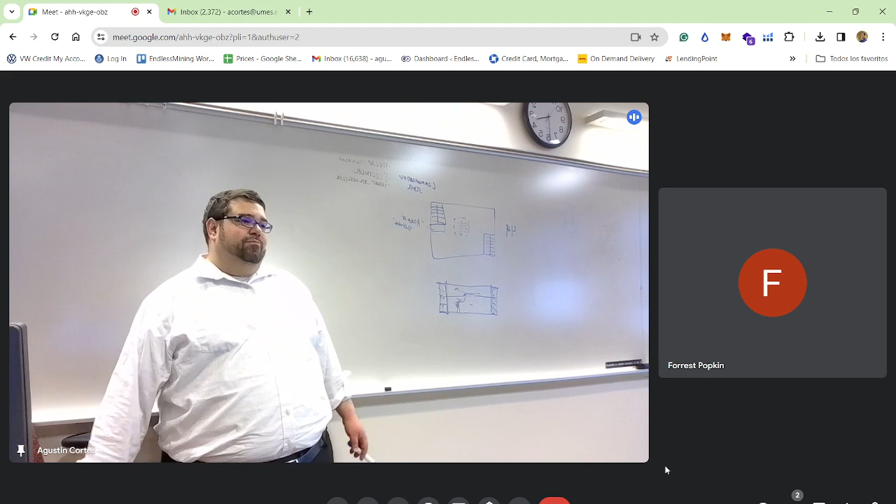So the bottom line here is that the communicating stair is not just able to be this gigantic hole in the floor. So how do you think we solve this problem? Anyone have a theory? Everyone's been to lobbies and stuff where you see these beautiful, sweeping, I'm winging it here, mezzanines, and you have big open stairs that are just sweeping gigantic spaces. Let's just apply this for a second and ask yourselves, how do you think they get away with it?

Fire curtain. What's a fire curtain? Something that sits, I guess the best way I could describe it is like when you're on the boardwalk and businesses put down gates in front of the businesses like that. Yeah, but it basically hides under a bulkhead and kind of operates like a rolling door almost. So maybe I can hide it in a bulkhead that follows this mezzanine, and in the event of a fire, right? The whole thing kind of gets enclosed. Is that what you're kind of saying? And then maybe here there's a slow descent and it cuts off that stair.

Carlos, am I boring you? No. I don't think I've ever had someone so loungy, with their eyes closed, in the last 3 years.

I have a question. This setup that you're doing, you typically want to be on the side of the stairs, or do you typically want to be on the side of those doors? Well, it wouldn't matter. Basically, the idea based on what I said is that you couldn't count this as a means of egress, and you'd have to have another way out anyway. So even if that thing shuts, you're supposed to have another way out. And that's actually why that's the case.

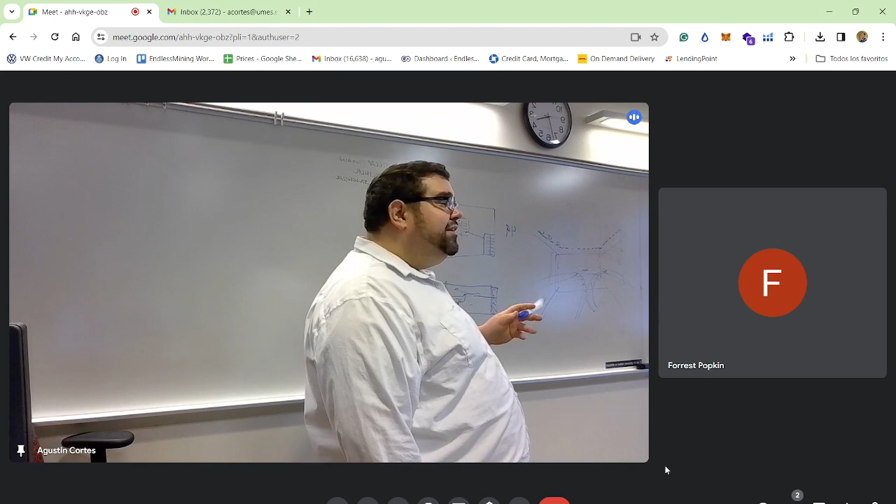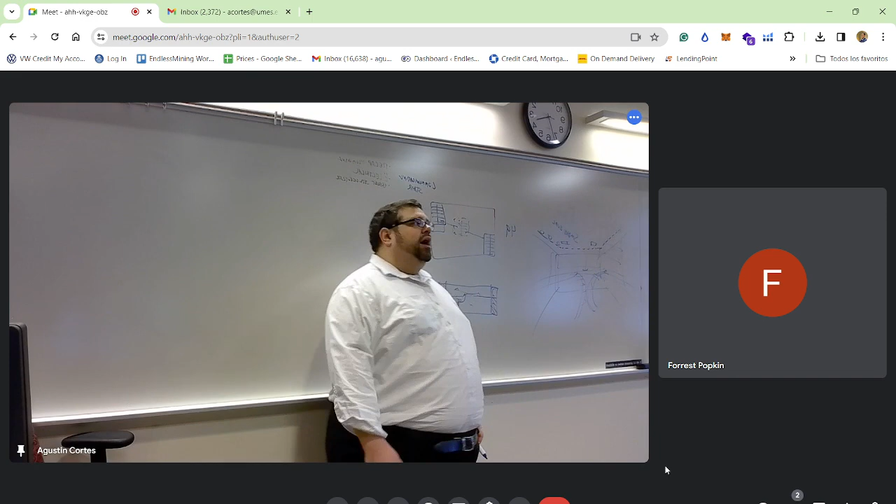Because if you did something like a fire curtain, right? I don't think it's really called a fire curtain per se. I think there's a specific word for that. But that's a good way of framing it, that it's like those things on malls or the boardwalk where you shut down your thing, but they're fire tight. They're not just open. Another way you could do it is with advanced smoke evacuation technology. Smoke evac is when you have HVAC that is designed to have a heavy suction that's connected to your fire alarm.

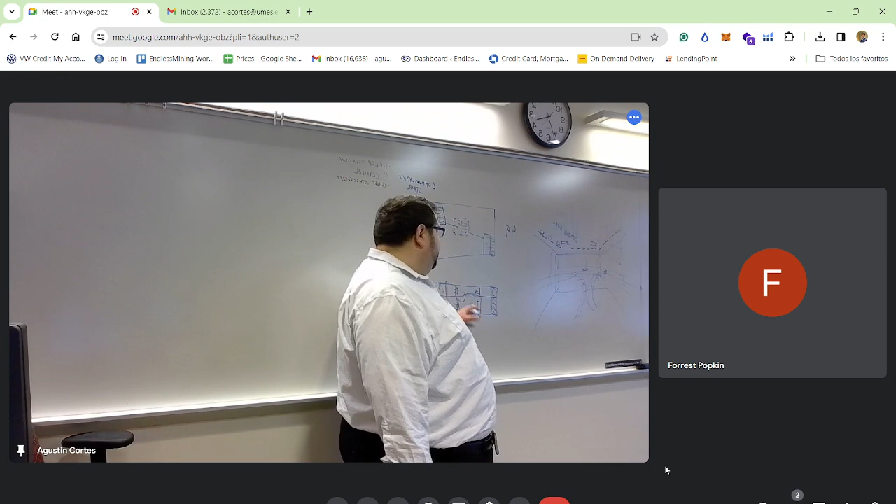Another way you can handle this is by creating situations inside the section plane that create doors that can be shut in the event of a fire. This happens most of the time in office buildings. Next time you go to an office building and you see one of these types of stairs, or a hotel or a school, one of the things you might see is if I have a plan on my second level, and I have my open set of stairs, they come out and it's all monumental looking, that immediately in the periphery, I might have doors that are on hold opens.

These are like walls. And so when the doors are open, it just feels like a more open space. But in the event of a fire, those are on fire alarms and they'll close. That way, people could still exit because they could push through the door and go to the stair, but the smoke isn't just billowing throughout the entire room. Anyone have any clue what we use here in this building?

Hey, everyone get up. You're in for a real treat. Come on, seriously, get up. Come on. I'm in for a real treat. Yes. Let's go. Come on, let's get to it. Part of learning is getting out of your chair now and again. I need this. That is a real treat. I support it. Okay, so one of the things you can do, like in gym class, now that we're up, is okay. Put your hands out here and you get one. Get that blood circulating.

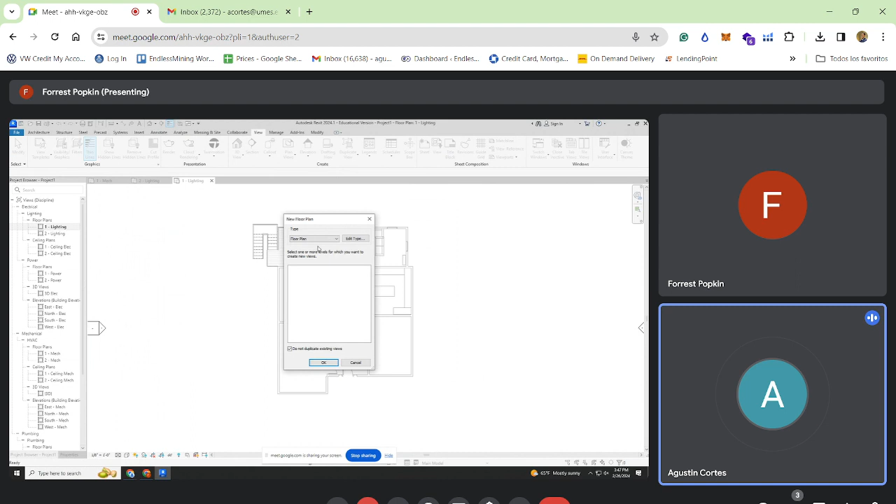You will see that you are limited to the first 2 floors. So just like before, if I need to view another floor, I have to add the level that's commensurate to that floor. Yes. So you know how to do that by now. If I went to floor plan, you'll see it doesn't show any floor plans, because I need to make the level and the elevation to correspond to such a floor.

But right now, let's just focus on the immediate, let's just go to level 1. So we have level 1 lighting, level 1 ceiling plan, level 1 power. On HVAC, we have 1 through 2, and then we have plumbing 1 and 2. So depending on what view we're in, for example, if I click plumbing, you'll see that plumbing 1 has my fixtures there. Oh, yeah. Isn't that a doozy? I linked all my toilets and urinals and stuff.

One of the things that's interesting about that is that every system also has its 3D view. So you'll see here in my 3D view, I have a sink kind of floating in space. Oh, that's actually really, really nice.

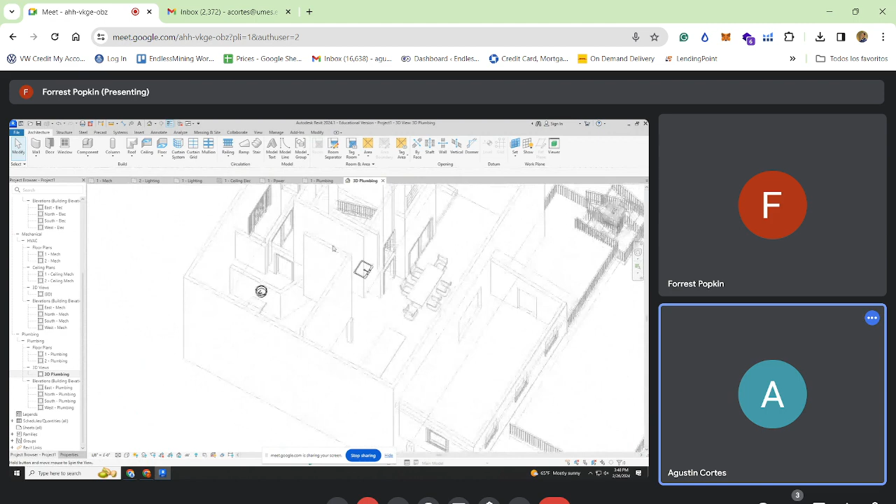I'm glad you're liking the class today. No, it's just a couple seconds ago I was asleep, and what we did right now kind of got me up. Yeah, that Starbucks wasn't doing the trick. I don't drink Starbucks. I know I work there. You don't sample your own product. I don't like it. Have you drank any of the coffee that I gave you? I drank all of it. You want another bag? You trying to get some better grades, man? No, I don't do quid pro quo, but I do like coffee. I have a large supply. I'm getting it from Colombia. It's too bold. I like bold coffee. You're saying all the right things right now. Guys, we are recorded, so please don't admit to any illegal activity. I sell coffee beans on Minecraft. I am so old, I don't know what it means to sell coffee beans on Minecraft.

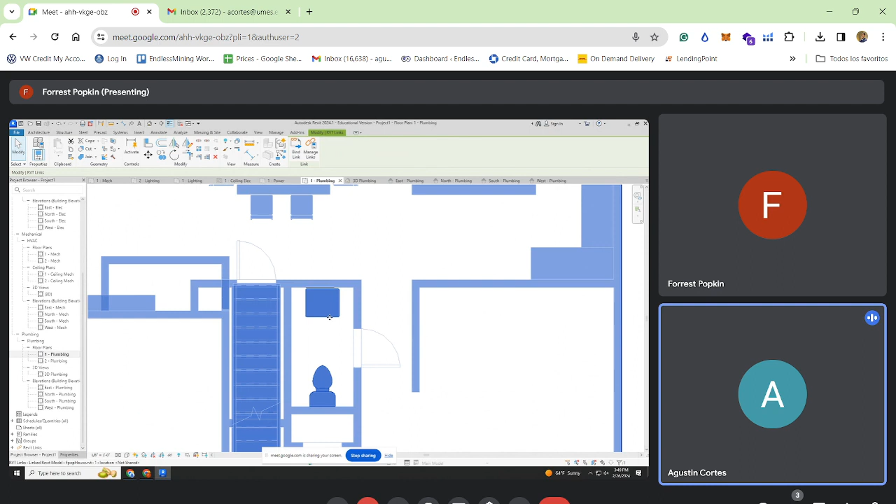So you'll see something interesting. If I try to take my pipes, it won't actually feel like there's anything to connect to. Now, just because it's blue and it shows up doesn't mean that it's actually in the model.

So what's interesting about this is that when you're an architect and you make a plan and you hire consultants from outside to work on the plan, whatever they're putting into the project that's in their scope, be it duct work, water heaters, piping, fixtures, all that really still is their responsibility as the consultant. So you might show a specific style of toilet, but ultimately they might dictate, maybe it should be this type of toilet.

So this is the opportunity for you as an engineer to be like, hey, I saw that you specified a floor-mounted flush tank toilet. I think we want to do a wall-mounted toilet. So the bottom line is, even though you designed this already and put a toilet in its place, in the systems model you're expecting to put the fixture back in place.

So you have to actually overlap it and put another type of that in its place. Otherwise, you're not going to be able to link to it in the systems. Carlos, I just got done explaining why. So don't make that face. We can talk about it again.

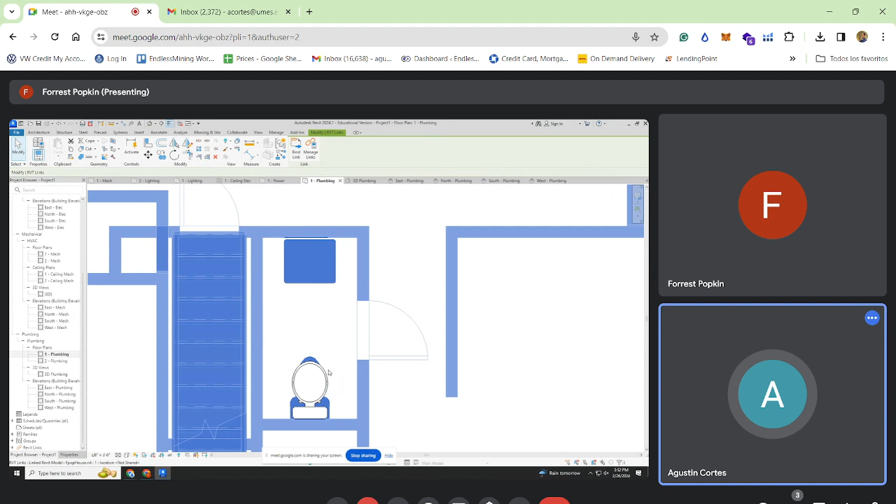So I'm going to go ahead and rotate this puppy in place. And you'll see it doesn't even look the same. So what I would do with my architect would be I'd coordinate this with them, saying, hey, this is the model. They'd probably end up removing the one that they did, and they'd match yours as an engineer. But the point is, now that I have a fixture on the screen that has an in for cold water and an out for sanitary, I'm able to make those connections we were talking about the other day.

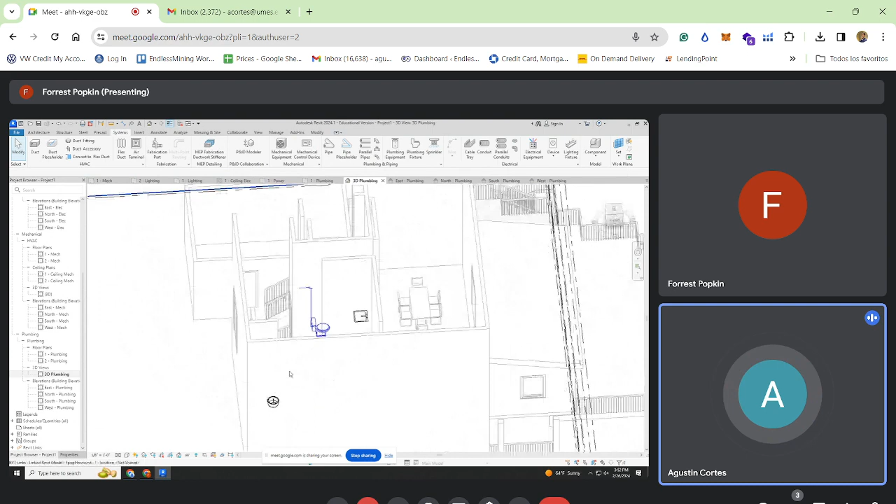So in my model, I should be able to take the pipe now and run a pipe. And of course, as we talked about at the top of class, blue will be the water line. Typically, water lines will be run in the floor above, getting you to wherever it needs to go below. Sanitary, of course, would be different. It will come from below. You gotta make sure you're actually connecting. So we talked about this the other day. It should be an X, right?

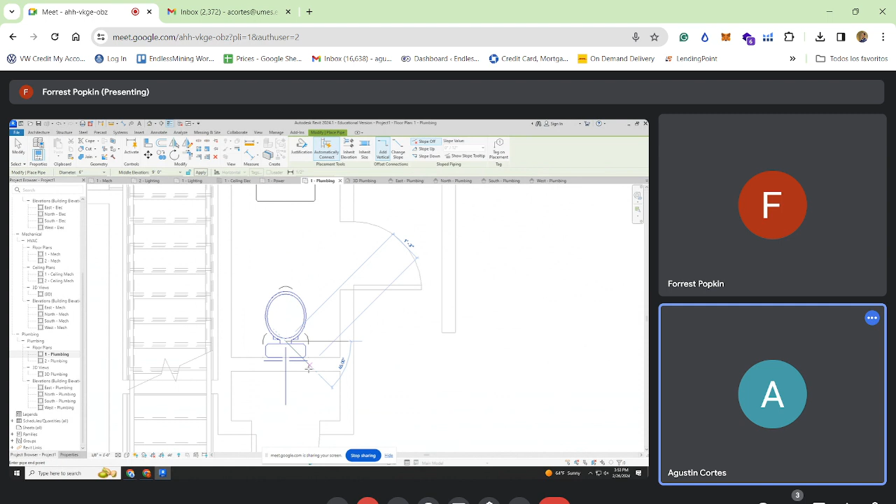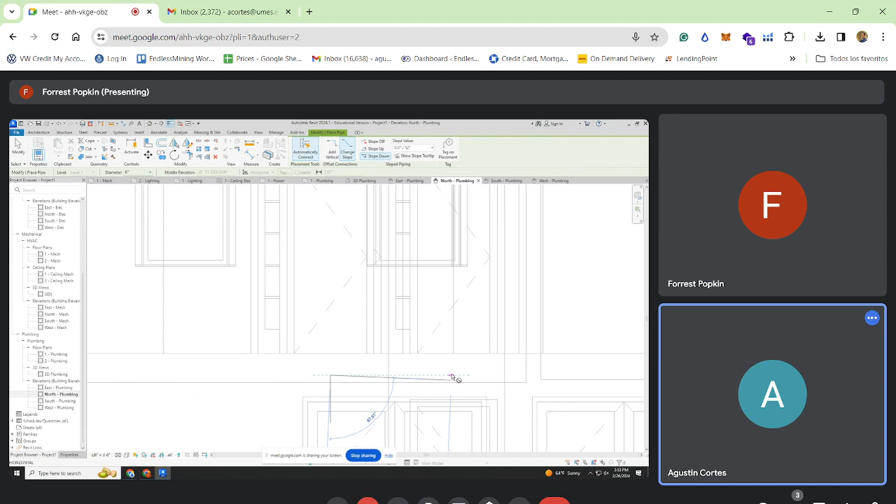So again, you're gonna have to have different views open to be able to do this without losing your mind. But usually the sanitary connection point will be the junction of your fixture and the floor. So in this instance, we don't want to add a vertical. We'd like it to have a slope down, so change the slope and pick a slope of some kind. So I'll do 1/2 inch. So you change slope and then select the slope down, and then you select the value. Yeah. And you remove automatically connect, right? Yeah. After you have the stub out.

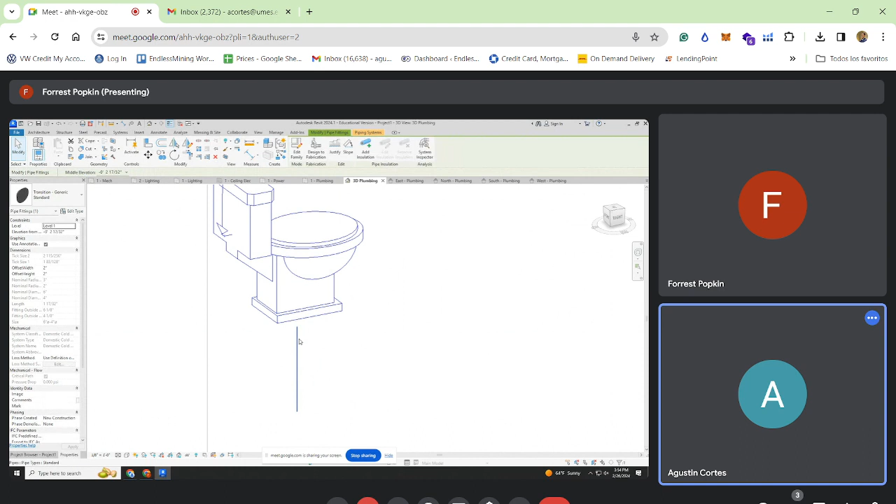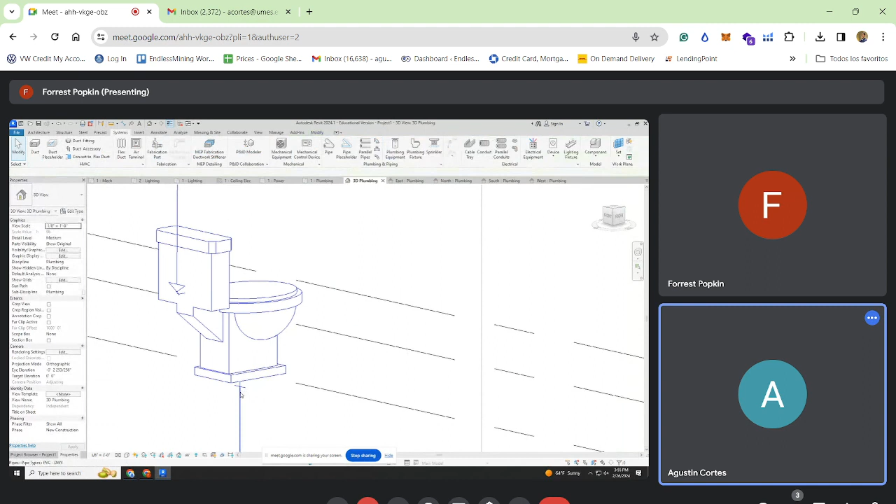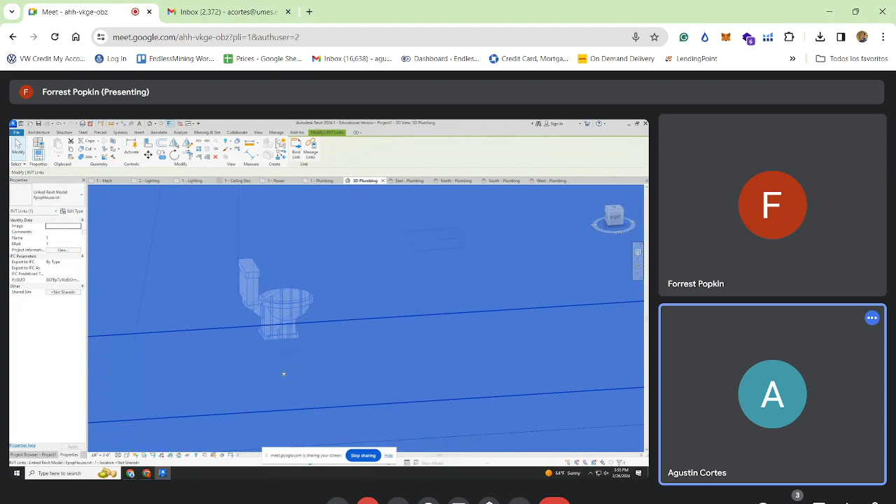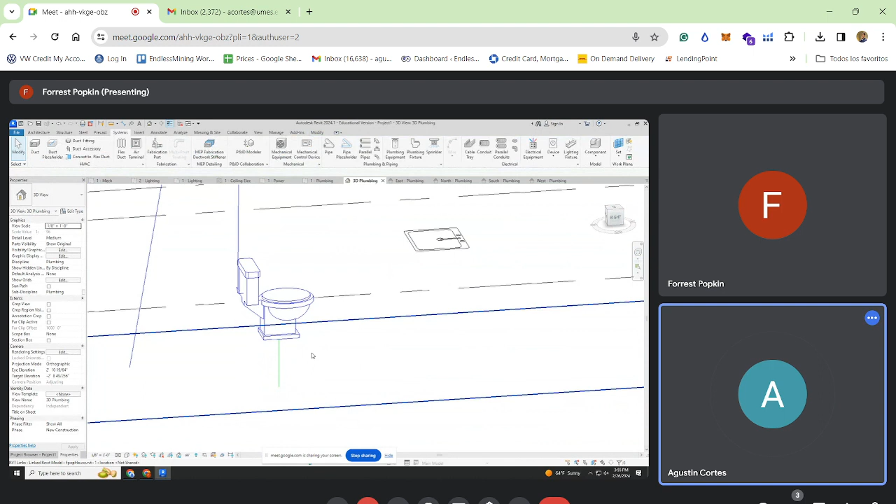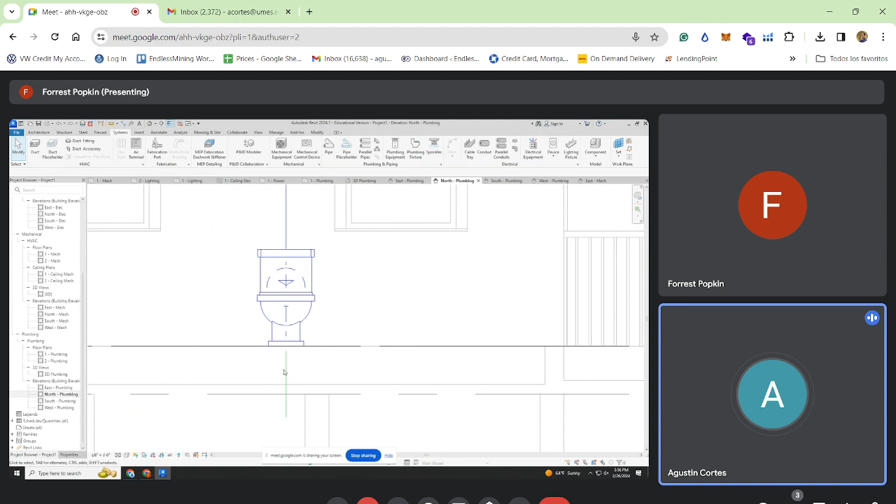Let's say I didn't put it right on the wall. I wouldn't be able to move the original model from this view, correct? I'd have to open it up. Yeah. Now you can, of course, place the toilet in a slightly different location and go back and fix it in your other model. There's no crime against that. Does that make sense? Yeah. I don't know why I left a half-inch between the wall and the toilet on every single toilet. Sometimes it doesn't look right if you put it like that.

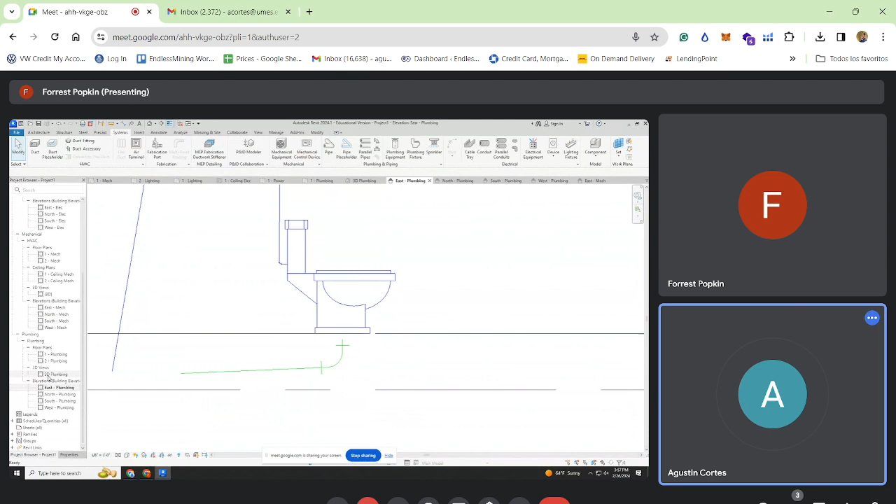I have a question. For me? Yep. What do we do if we cannot see the lines under plumbing? If we're just placing the lines and we don't see any of it. Have you looked at different views to see if it's still not showing up? Yep, on 3D views, it's not showing. Are you sure you're clicking the right 3D view? You have to be in plumbing. 3D plumbing, that's what I meant. And you added the pipes? I added a pipe here. So maybe it just didn't draw? You don't see them anywhere? I don't see any information in there.

Plumbing, right? Okay, then you add the toilet. I told you to add a toilet, remember? This is not added here? No, I told you this already. I said you have to reconnect a plumbing family. So you have to go to your families. Under systems, you go to fixture, plumbing fixture. And you have to add a toilet in that place. The exact same place? Yes, exactly. Where were you? I had a whole conversation about that. As silly as that sounds, you have to do that. Otherwise, you're not going to have something to connect to, because it doesn't read your baseline model as having a plumbing connection.

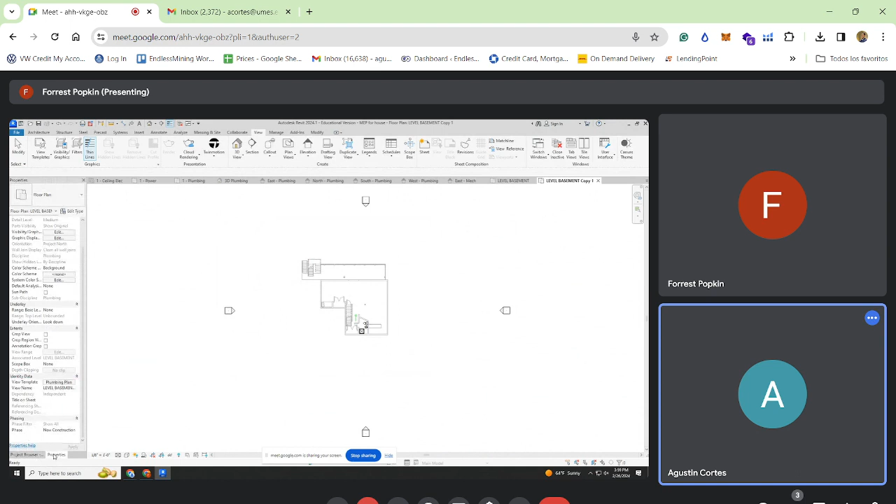So one of the things you're going to have to do for your model, whether it's on your first floor, second floor, wherever, is you have to understand where your water heaters are going to be. In a commercial office, it's not uncommon for every floor to have its own water heater. If you don't have a heavy use of water, like a commercial kitchen, but you have a few hand sinks, whether it be a kitchen sink or not, and a few toilets, typically you could do the work with what's called a low boy water heater.

I actually noticed one today in my office. I should have taken a photo. But a low boy water heater is actually pretty cool. Basically, if I have a door on the wall and I walk in, now I'm inside the bathroom, I'll have my ceiling plane, and then there'll be structural deck above. This is where all the duct work is going for the venting and sprinkler lines. Typically you'll have what's called a unistrut system that creates a box, and a little cylinder sits on top of that unistrut, and that connects in the wall to supply hot water for that sink.

Why? Because how often am I washing my hands in an office? It's a few people now and again. I don't need a gigantic water heater for that, right? So these low boy guys will suffice. But for the sake of argument, let's say every floor had to have a water heater. Well, now you're experiencing your first architect headache. I didn't give you space for that. In your floor plans, I never told you you had to have room for a water heater. Guess what? Now I'm telling you. Boom, a water heater in there. Okay, there you go.

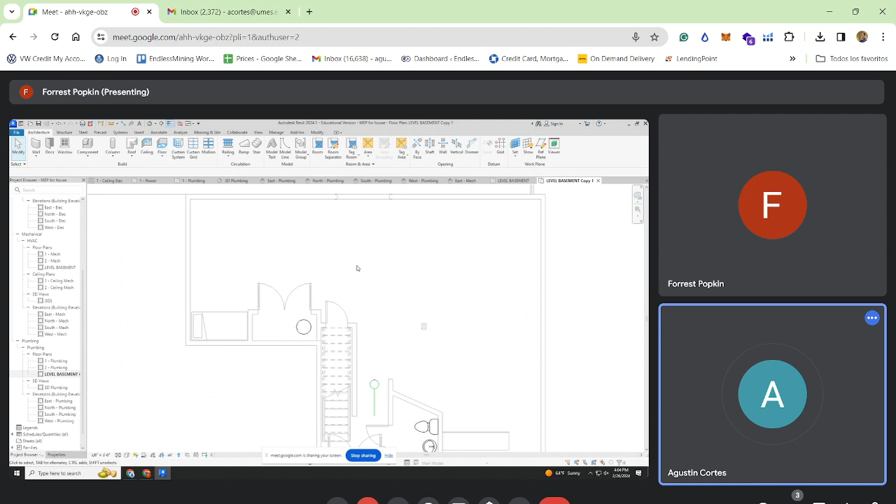And I put in bidets back in the day. If you want to put a bidet in, that's up to you. Nothing says I'm comfortable with my colleagues like sharing a bidet. Probably culture. I'm not going to talk about it. What you do in your building is up to you.

So go ahead and play with that for another few minutes, and then we're going to talk quickly about baseline electrical.

How big is a water heater room typically? If it's just dedicated for that one purpose, I'd say 3 feet by 3 feet, because that's pretty much the size of the door. Okay. And then what about rooms for the furnaces and the electrical panel? Are those similar size? 3 feet by 5 feet for a furnace, an electrical room 3 feet by 5 feet.

Great questions. Do you want us to make the electrical panel, the air handling unit, and the water heater right now? No, I'll get to that.

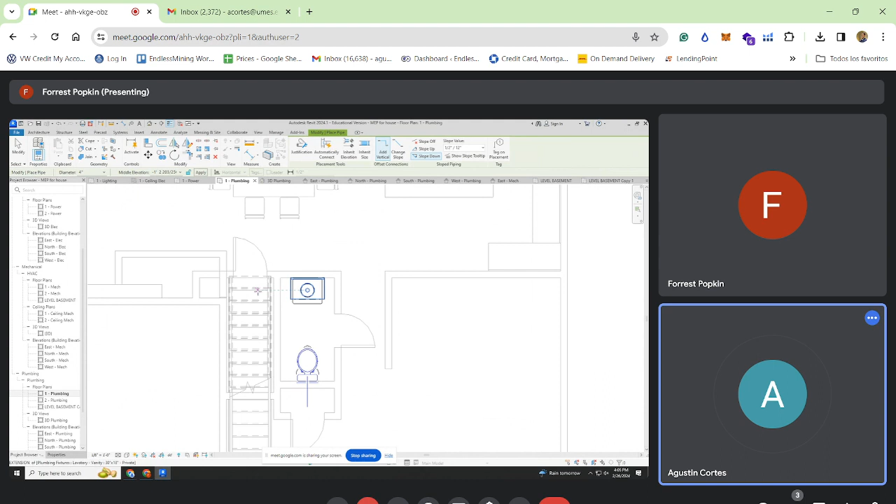It's cool to start to see your building connect between floors.

So in my house, I have a water heater in the basement, which is why it takes forever for my daughter to get hot water to wash her face. But that's another story.

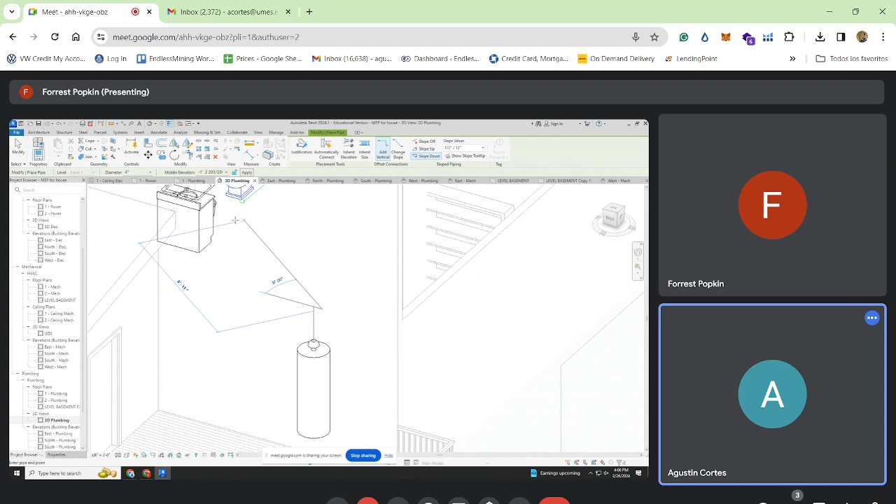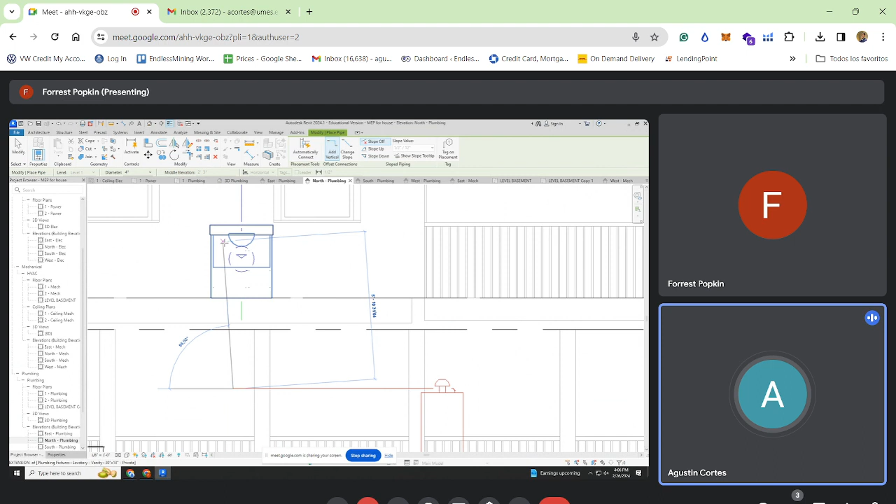I have another question. Yeah, what's up? You might have mentioned it, I think I might have heard you when you were talking about this. Do we also need to leave the previous water faucets and all the stuff from the bathrooms that we did? No. Okay. When you reload the system, is it supposed to replace it automatically? No. Well, the problem is if you delete it, then it's not going to show up on your other model, right? Okay, because right now I have two of them showing.

Yes, and until we reload the MEP model, I don't want you to do that because then your toilets will disappear. So for now, endure the awkwardness of having two toilets, two sinks. But once you get all this stuff put in, you can relink your MEP model to your architectural model, and then all that stuff will show up. Does that make sense? Yes.

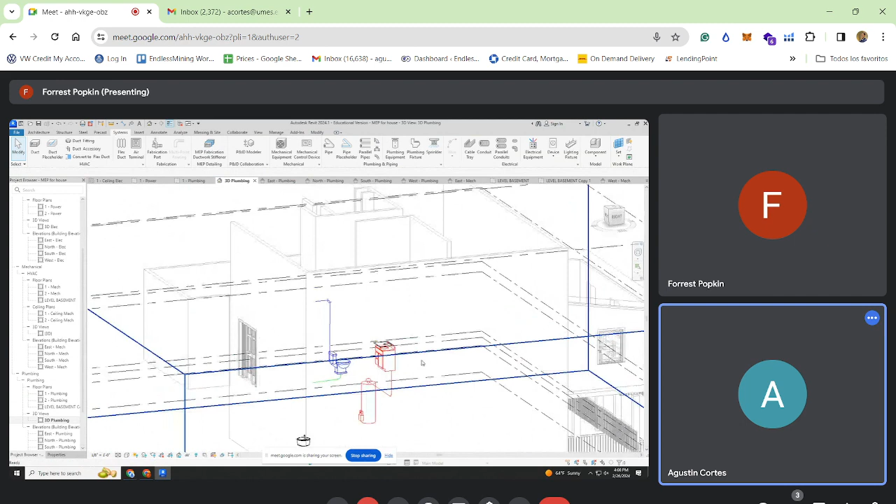So one of the other things you're going to ask yourself: how does water come into my office building? Typically, you'll have a water room. And that's also near where your sprinkler room will be. Uh-oh, I also didn't mention those. Now, the good news is you have warehouse space. Easily notch out a little piece of those. But typically, you want all your water in your building to originate in one single source, right? Because you need your cold water to originate somewhere. It's just another thing to think about.

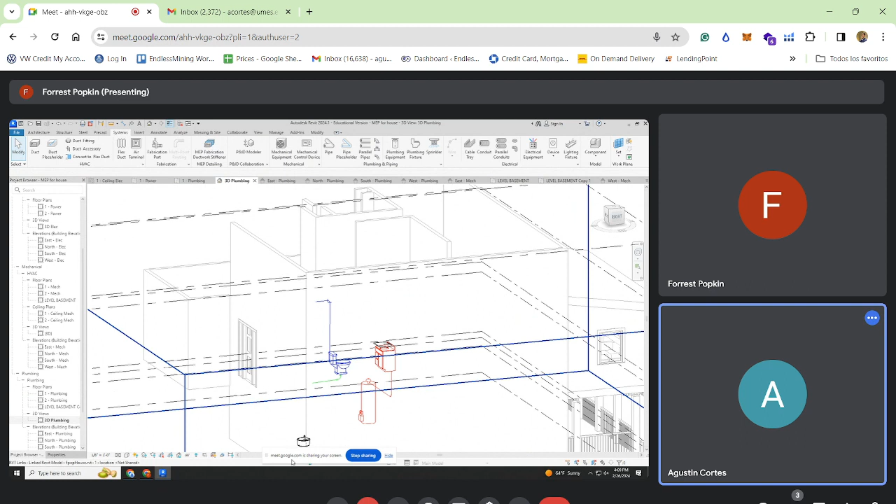Hey, Professor. I'm kind of struggling how to get more levels. Oh, actually, I see it now. Hold on, while you're on that topic, let's just look at this together. So again, my MEP reference model is a little different than my architectural model. Let's just go to electrical plans. In my electrical plans, I don't have a roofing plan. Let's say I want to go to the roof level. Can I have everyone's attention for a second?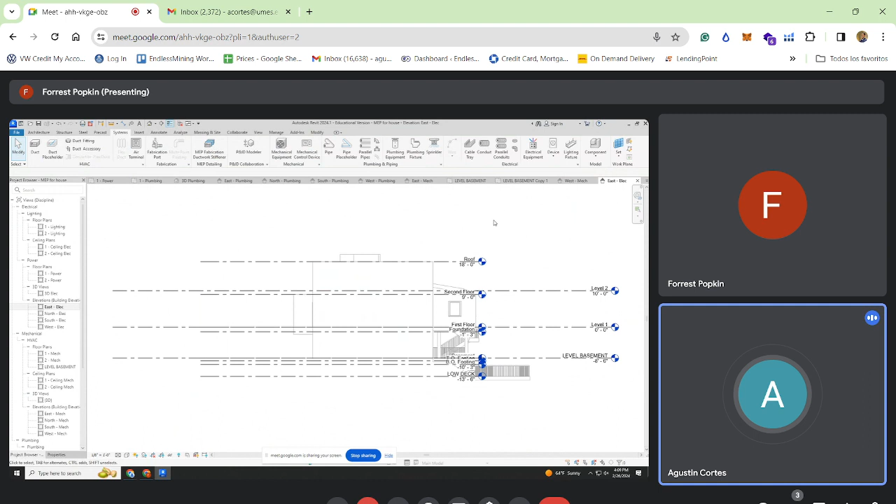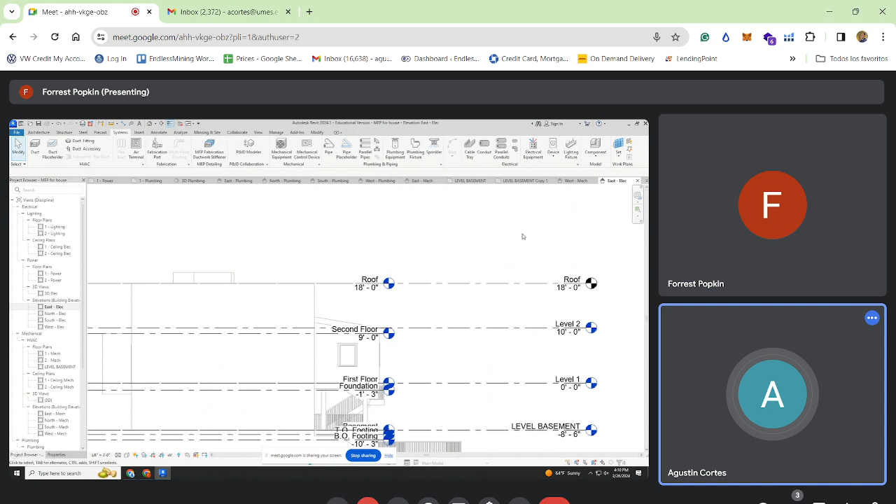So in order to do that, if I go to my elevations, you'll see that I have a roof level in my original plan, but I don't have a roof level in my MEP model. The reason I know that is because this one is linked to a family, and this one's on its own. So like anything else, I'll make a copy, bring it up a level, and now I can make a new level. You'll see it defaults to mechanical level 4. I'm going to call it roof. Don't forget what it defaulted to, because if I go to view, plan, floor plan, it will now say roof.

Okay, cool. I want to make a new plan for my lights. Wait a minute. It didn't add the plan to my lights. It added it to the roof plan here. That's not what I wanted. But now that I think about it, I could use a mechanical floor on my roof, but I still want to make an electrical one. So how do I do that? It's very unintuitive, so everyone needs to pay attention. I would make a plan duplicate by duplicating with detailing.

When I click on this plan and go to properties, you'll see graphics, underlay, extents. There's something called identity data. The identity data is still calling this a view template for a mechanical plan. So I have to click that, and pick if it's an electrical plan, a mechanical plan, or a plumbing plan. I want it to be an electrical plan. So I go back to my browser. Now it moved up, and it's in the electrical plan.

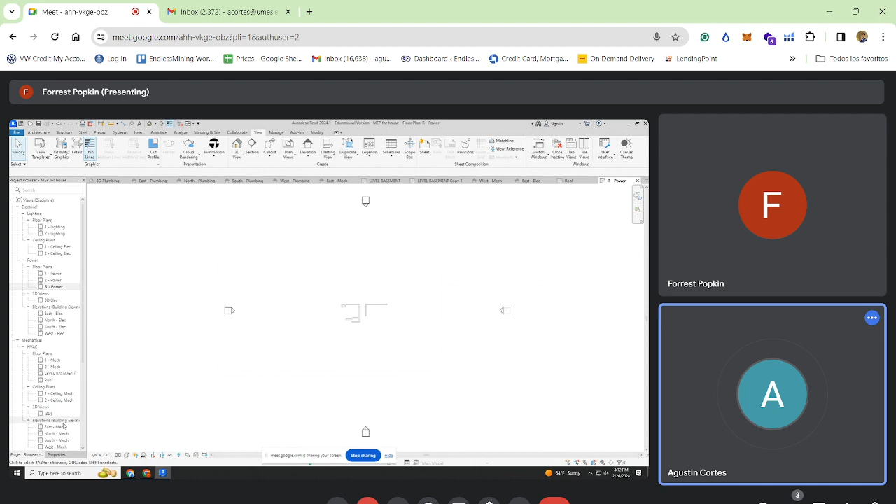Why do they do that? Why? Yeah, that's stupid. Well, I don't know. I wanted to work for Autodesk once upon a time. Maybe I could have answered you then. How'd that go? I was unemployed and desperate, and I applied to everything, and it didn't go well. Actually, that's not true. This was in my let me move to Japan phase. This was 5 years ago, and I was applying for a job in Tokyo. That still didn't go well. Did you already learn Japanese? I know a little Japanese. Konnichiwa.

So the idea is that we should feel comfortable with plumbing.

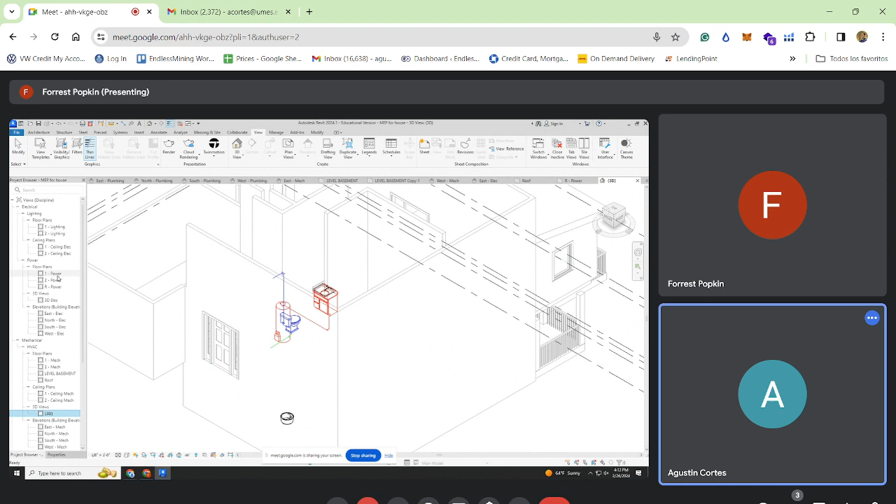So electrically, just to recap what we had talked about briefly last year, there's two different types of electrical plans. There's the electrical plans that are showing lights, and then there's the electrical plans that are showing pretty much outlets and things like that. And in any given plan, you're going to have to show outlets. So just to recap how we would do that, first of all, make sure I'm on the right plan. This is default troubleshooting number one. Am I on the right plan? Because there's so many plans, right? So you gotta make sure you're on the right one. I'm on whatever level I want to be.

Then I go to electrical equipment, electrical device, or lighting fixture. So electrical equipment is going to be things like panel board, transformers, Ethernet switch. That's pretty much not what you want. You're going to want mostly devices. If you recall, the device scroll down includes electrical fixtures, which would mean like an outlet, communication devices like call buttons, and then data would be the data jack, fire alarms, lighting toggles, nurse call buttons, telephone, etc. So if I go to electrical fixture, the default will be a standard duplex receptacle.

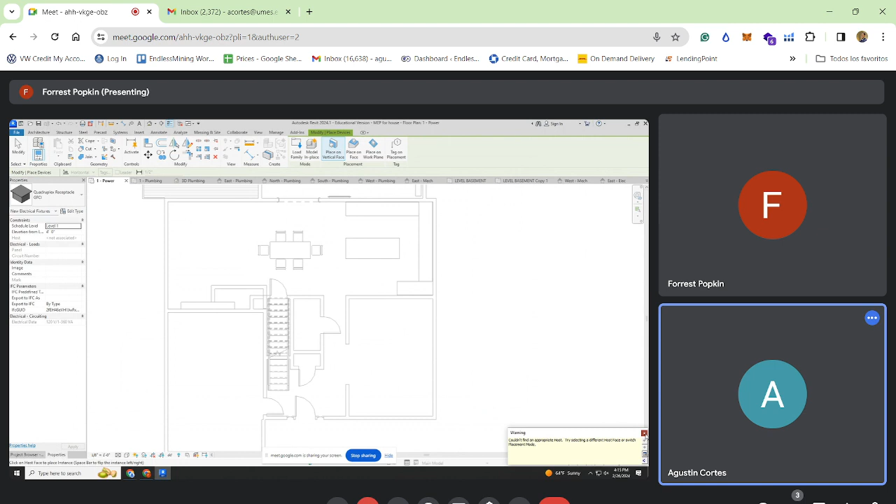If I went to load family, I go backwards, go to electrical, MEP, electrical power, and it says these options: appliances, distribution, generation, or terminal. So a terminal is where it ends. That's the devices. So you have receptacles that go on countertops, you have receptacles that are switches, you have receptacles, then you have duplexes versus quadplexes. Everyone know what a quadruplex is? You have 4 of them. So I'm going to go ahead and drop a GFI quadruplex because I'm a baller. And I'm going to put this in my kitchen. And voila, just lets me dump it there.

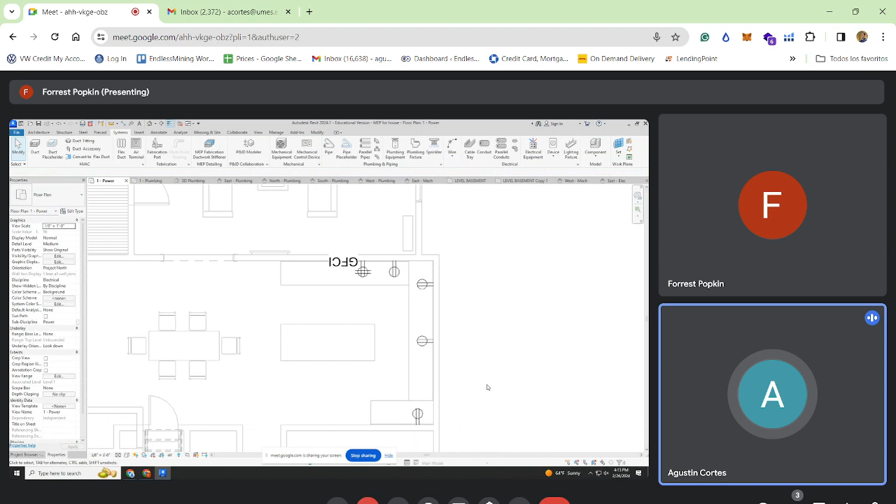So basically I could just with ease pick my different devices and spread them around my kitchen or my house. Generally in a house, which you're not doing, the rule would be if it's near water or if it's like in a garage or somewhere that could get wet, you would want it to be a ground fault interrupting outlet. So bathrooms, so on. In commercial settings, it's similar codes. So in your kitchenette, in your bathrooms, that's where you're going to have the GFI outlet. But the expectation is that you would know at least how to use this tool to drop outlets.

If I'm in an office, the expectation is I might need Ethernet cables. So typically, data cables are just shown as a triangle. I am curious, just for the sake of looking, what types of equipment they have for data devices. If I go to load family, communication. So you see they get pretty complicated in the MEP modes. You get ceiling daylight sensors, photocells, thermostats, wall occupancy sensors, communication, you get intercom switches, clocks, buzzers, security systems. So you can get pretty creative. For some reason, they don't have any data in the data one. So go to architecture. The only extra outlet you could add is like a TV outlet.

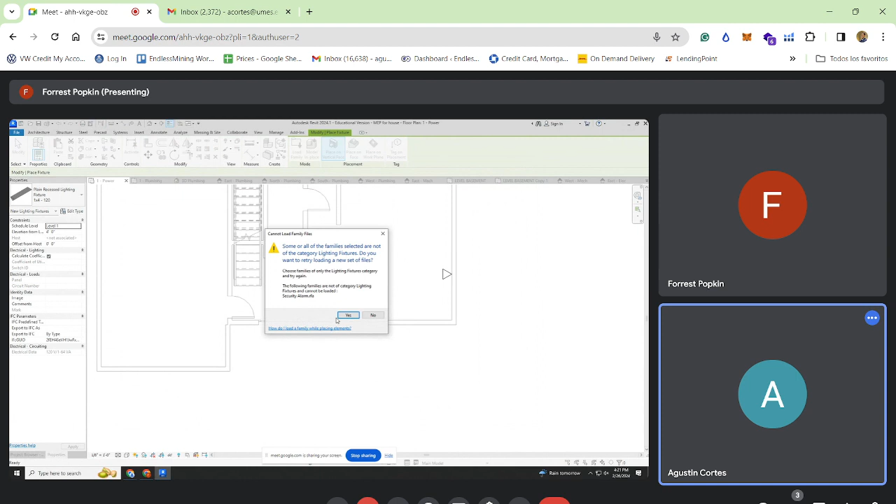Okay, what am I trying to find? I'm trying to find electrical MEP. Okay, call buttons, building controls, fire alarms. Does it make sense when we're doing these plumbing plans to start with where the sanitary is leaving the building? Like, what do you recommend? Should we go top down or bottom up?

So you're kind of beating me to what I was going to wrap up with, which would be part of what I want you to figure out: at least how you're going to master plan how everything's going to come to a place. So in a sanitary situation, clearly you have to know where the sanitary is leaving the building, right? And then a fresh water situation might not be the same space. My sanitary could be going one way and my fresh water could go another. But you should at least know the general direction in which you want to put that stuff. It's quite a tall ask for me to ask you to completely plumb everything because that would take too long. I have to be reasonable about my expectations.

But to put it back on you, would you rather do all the plumbing for one floor, figure out where your stack wants to be for your fresh water, your hot water, and your sanitary, and leave it at that? Or would we rather make the homework assignment: find where your water's coming in and where your sewer's leaving, and then get everything figured out on your base model for your electrical room, your water room, stuff like that? I could go one of two ways. I don't think I want to give you all of that because then I'm just going to be disappointed when I come in next week. That's my honest answer.

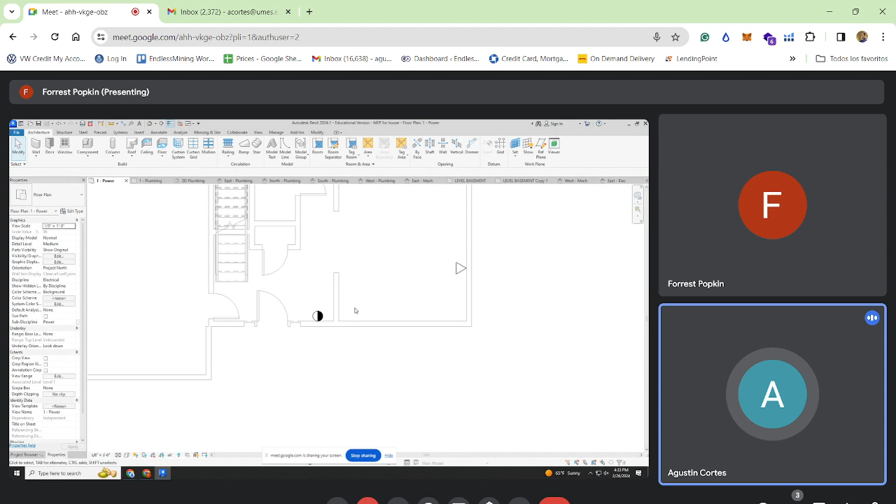How big is the sprinkler room? Oh, God. I ask that question at the beginning of every job, and every engineer goes, it's never big enough. And that's ridiculous. So I guess the water room? Such a freaking lie. Yes, the water room will have the sprinkler. Of course they know how big it's going to be. The equipment has to be 5 by 5 usually for that. So I'd say 8 by 10 for a water room.

It's the size of a small office, very small office. But you know, I always tell people, your building ain't going to work without water, electrical, and air. So you can't pretend like these things are negotiable. You got to put them in, whether you like to or not.

You think we can ever get a water system tour with you? Water system tour? Like you want to go to the Busch Gardens? Not this building, I'm talking about the other one, the new one. I don't know anything about that water system. So didn't you do a report on that building? It's massive. Don't you know that guy? Which guy? You interviewed a guy for class, remember? It was a girl, the one who decided.

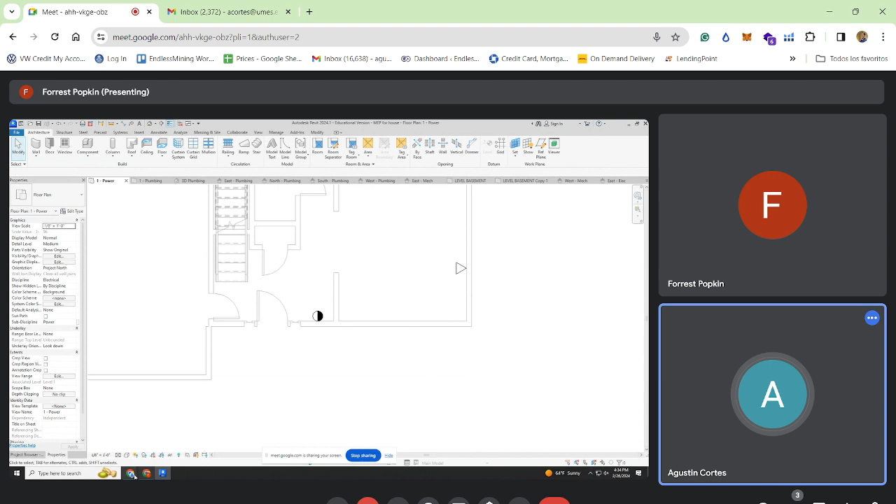I thought you knew the facilities person. He was not there. I thought you said you talked to the facilities person. I don't remember, anyways. Okay, if you think it's possible, I would love to. What I'm trying to get at is you would be the one to know how to get access more than me.

Bruh. Wait, what? You're the guy. Not the guy. No, not the guy. He's the guy.

Alright, Professor? Yeah, what up? What are some movies your kids are definitely gonna have to watch, like that impacted your childhood? Pulp Fiction. My Neighbor Totoro. That's a very interesting question. You said he's the guy, and then I was thinking about Spy Kids. My kids will definitely watch Spy Kids. It's terrible CGI, they're gonna hate it, but I'm gonna love it. That's a good attitude. I think the Muppet movie would be good. I like that movie.

That's an interesting question because my mom raised me to watch some inappropriate movies at a very young age. So I watched all sorts of horror movies way too young. Oh, hell yeah. I think it explains why I became the man I am today. And I like to subject you to a lot of horror in your homework assignments.